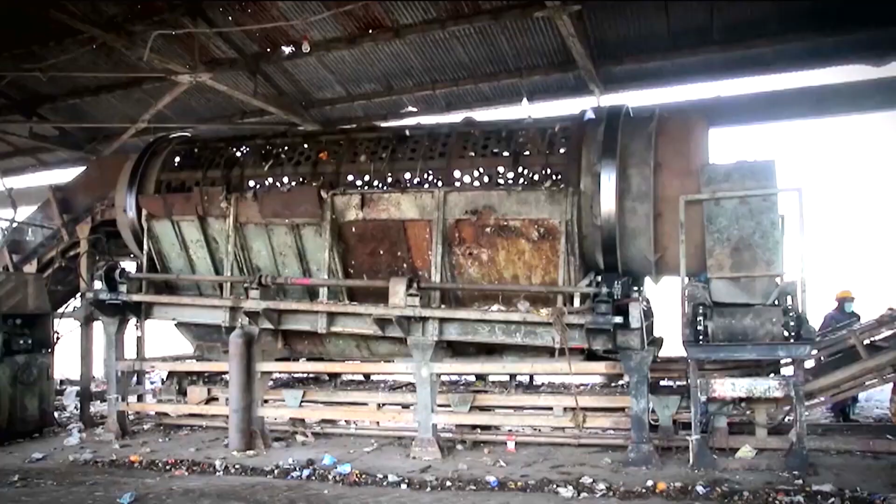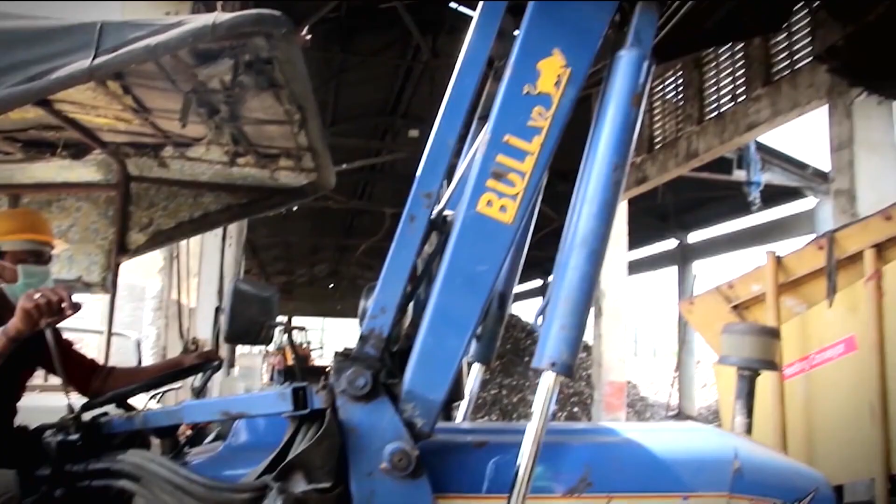Hence, the only solution is to recycle this waste and convert it into valuable substances which can be of use to us. This way, waste could have a new life. And that's where high-end expertise in waste management chains, recycling, waste-to-energy and waste-based fuel comes in handy.

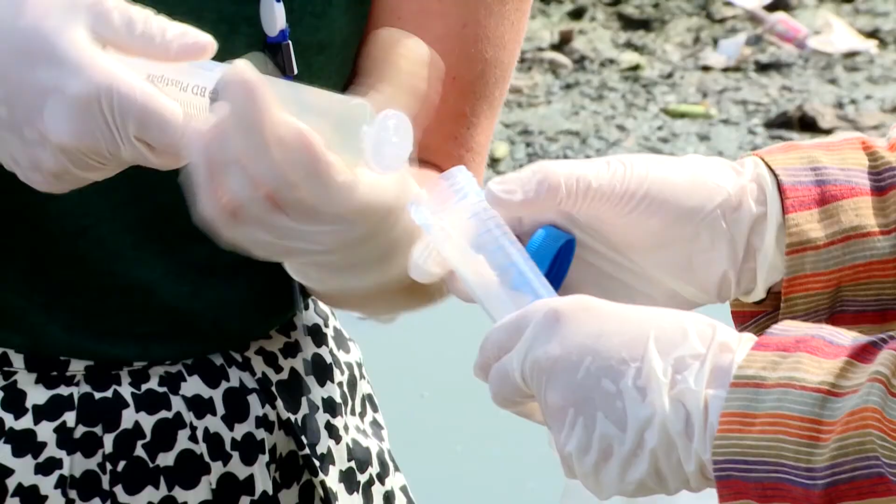The Department of Biotechnology is taking plenty of initiatives to convert waste to value. And in the process, they have supported a lot of projects. The latest of them is the collaboration of DBT with the Dutch to help clean Delhi's Barapulla drain, and finally initiate efforts to keep the Yamuna clean.

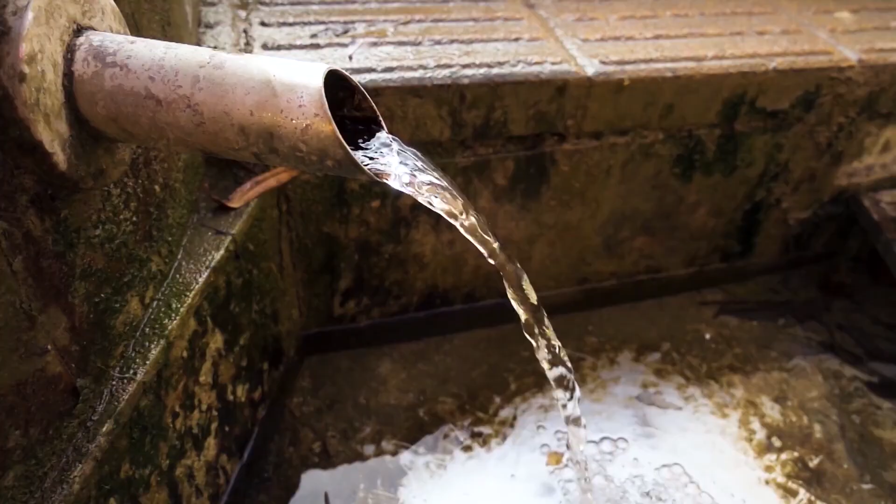The greatest need of all for all humans is water. And with the growing population of the planet, it becomes important to conserve and reuse water which is flowing in drains on a daily basis. Presently, only about 10% of wastewater generated may be treated. The rest is discharged untreated directly into water bodies, overloading rivers, lakes and the ground with toxic chemicals.

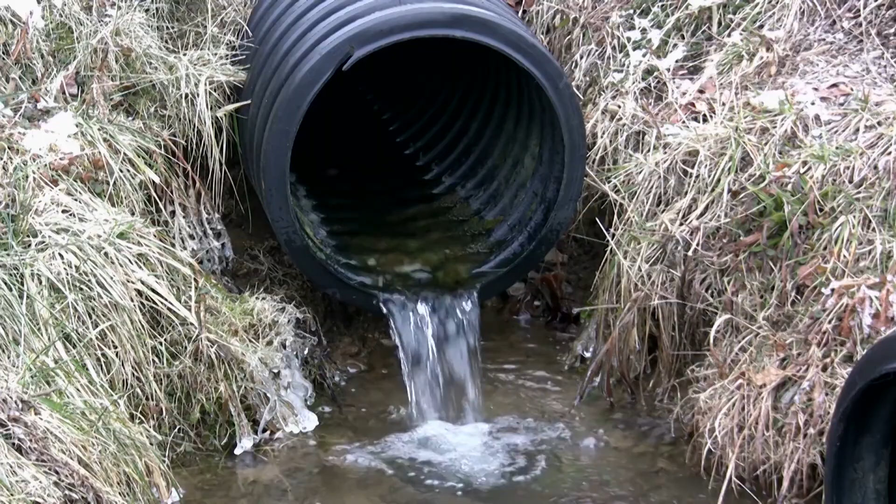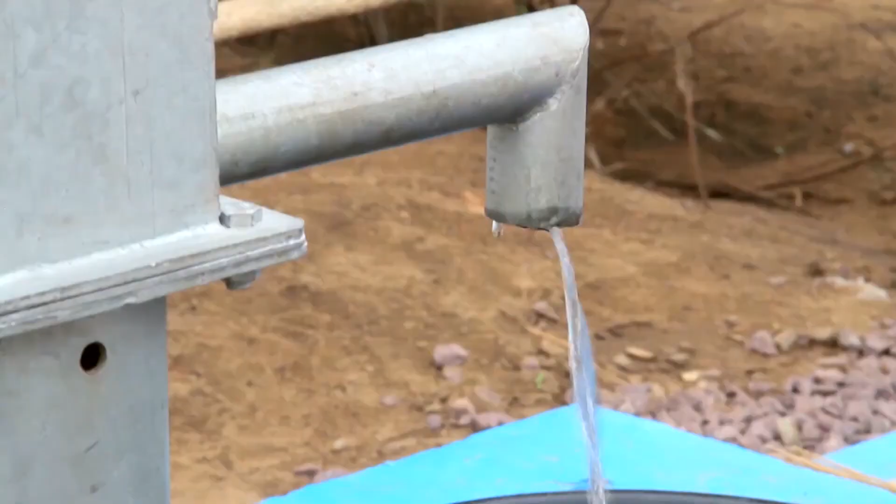As a result, pollutants enter groundwater, rivers and other water bodies. Such water, which ultimately ends up in our households, is often highly contaminated and carries disease-causing microbes. It is also bad for farming and any other water-related activity. These toxins find their way into plants and animals, causing severe ecological toxicity at various levels, including the human food chain.

In India, even if you talk about Delhi city, in the capital city also, the current existing sewage treatment facilities are actually capable to handle only 40 to 50% of sewage we generate. The remaining 50 to 60% of sewage is actually going to the river, and this untreated sewage is creating huge river pollution. And that you can see in Delhi city, the Yamuna river looks like a dead river.

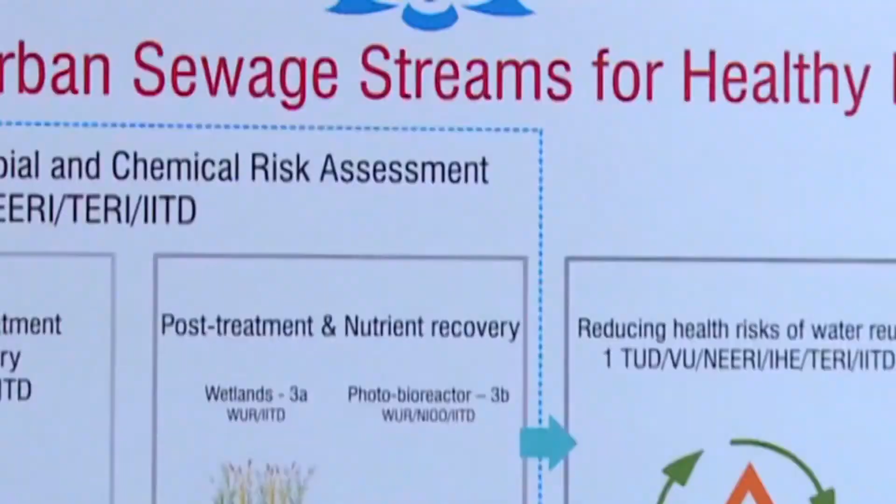Keeping this concern in mind, the Government of India joined hands with the Government of Netherlands and their respective agencies, Department of Biotechnology and NWO STW, and started Project LOTUS, Local Treatment of Urban Sewage for Healthy Reuse. The project is coordinated by IIT Delhi.

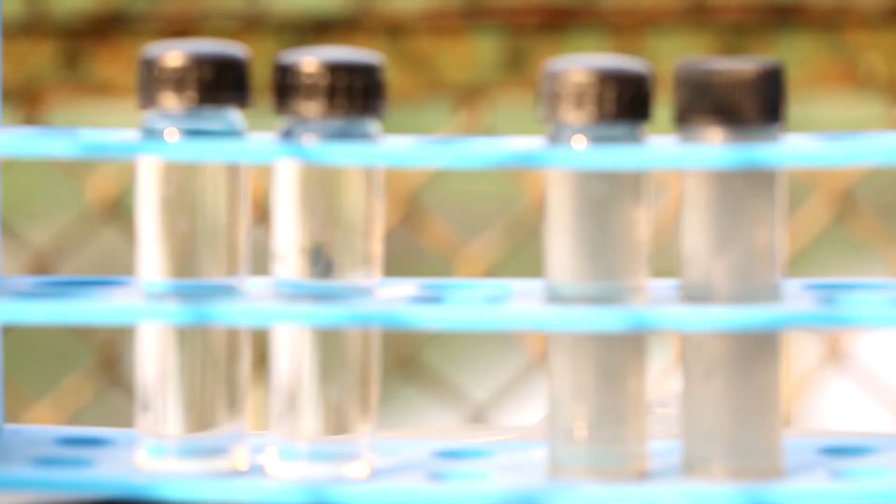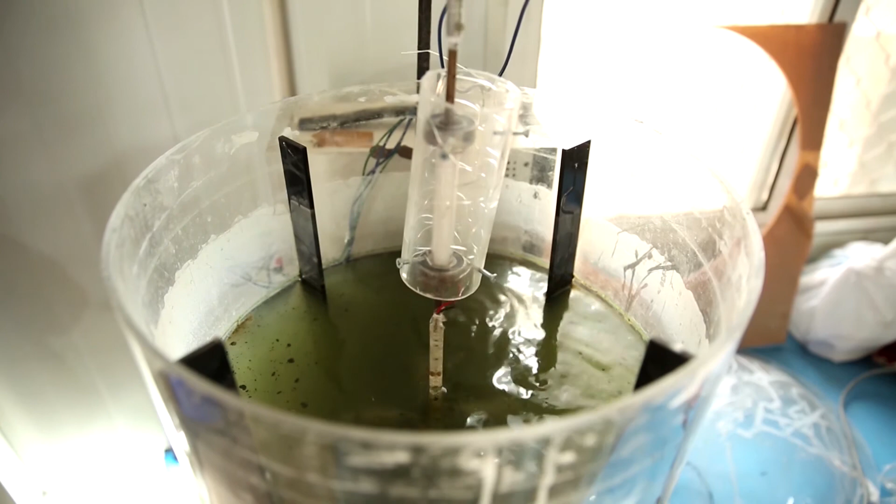The project aims to demonstrate a novel holistic wastewater management approach that will produce clean water that can be reused for various purposes like agriculture, industry, construction, etc., while simultaneously recovering nutrients and energy from urban water, thus converting drains into profitable mines. Special attention is paid to pathogen removal and removing conventional and emerging pollutants.

We are also giving emphasis on treatment of emerging contaminants. Within that, we are targeting antibiotic resistance, we are targeting different pollutants which are present in very small amounts, like nanograms or picograms per liter, and they also show adverse effects on human bodies, because it has already been proven that these emerging contaminants can cause cancer or other serious diseases in human beings.

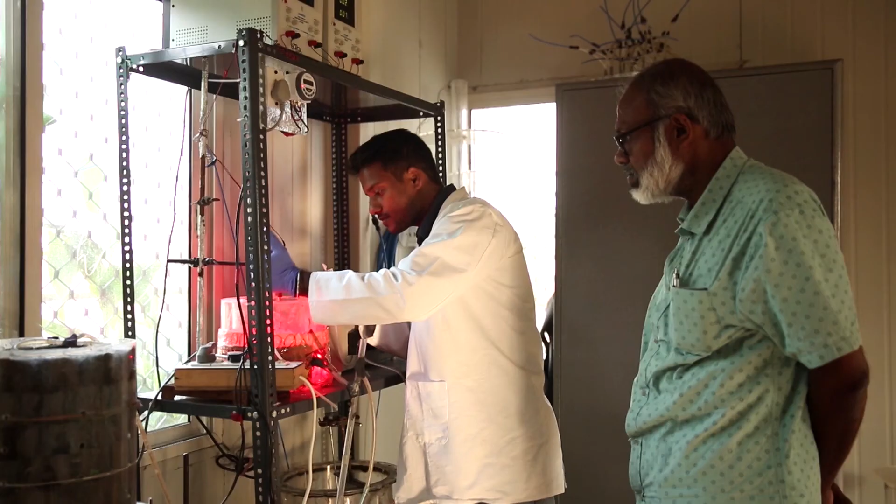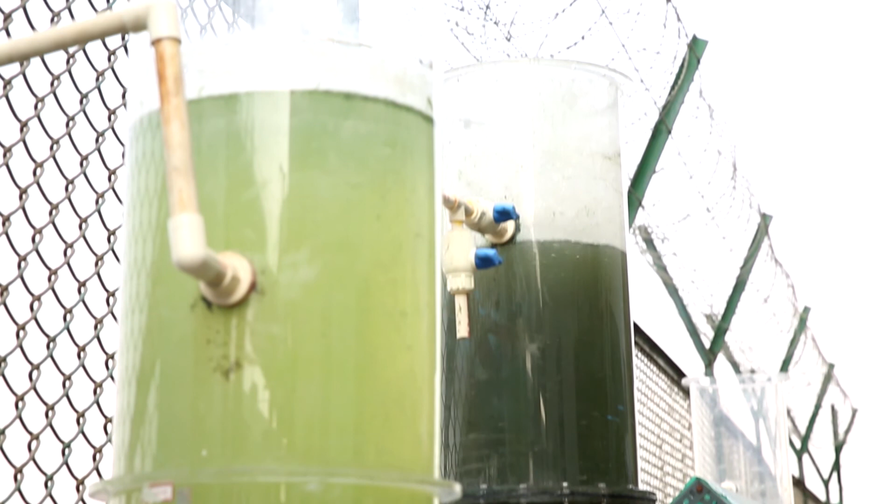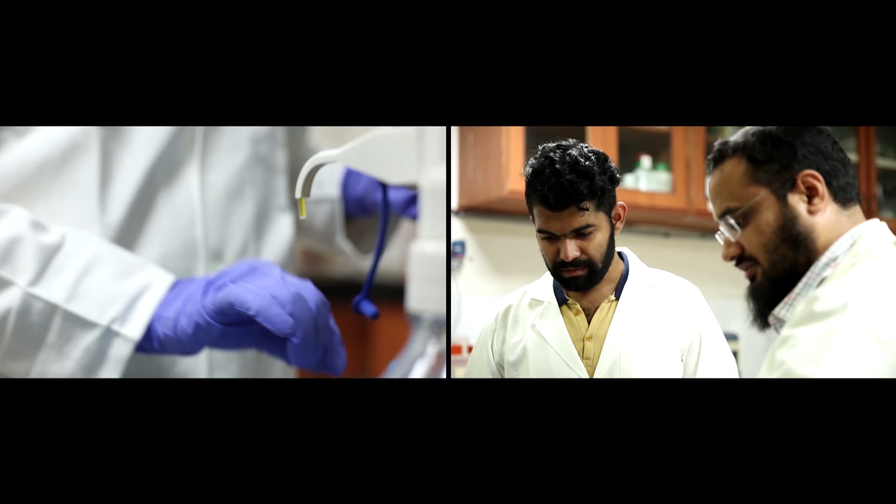An on-site laboratory and pilot plant has been developed at the Barapulla drain in Delhi. The design of this plant is scalable and modular to fit into highly populated urban terrain. It is very difficult to clean and purify water because there are various unseen pollutants, and therefore scientists don't come to know what to treat. To make sure that water is cleaned to the core, different reactors are used for treatment of Barapulla wastewater at this site.

Each reactor has its own unique specialized way of treating water. It is completely centered around treating the drain water. We have this lab constructed at the bank of the drain before it joins the river Yamuna, and all the reactors are set up inside this laboratory, and our PhD students as well as project staff recruited for this particular purpose are all working on these type of reactors with these objectives.

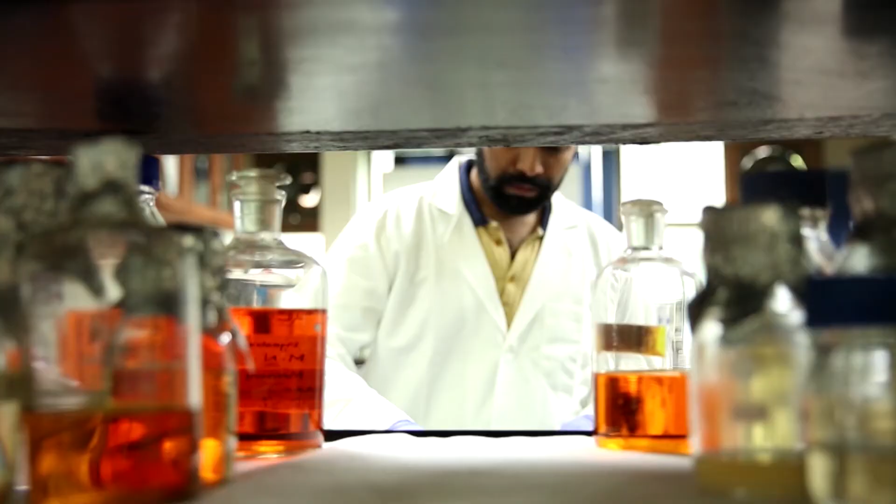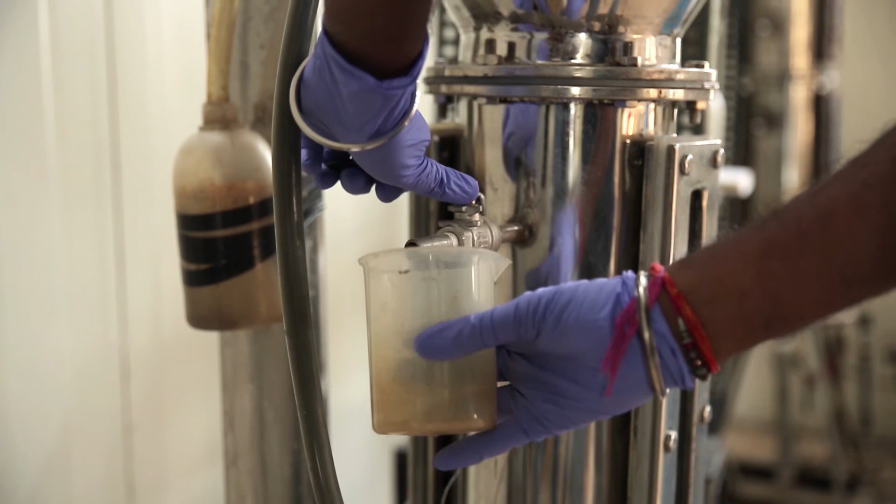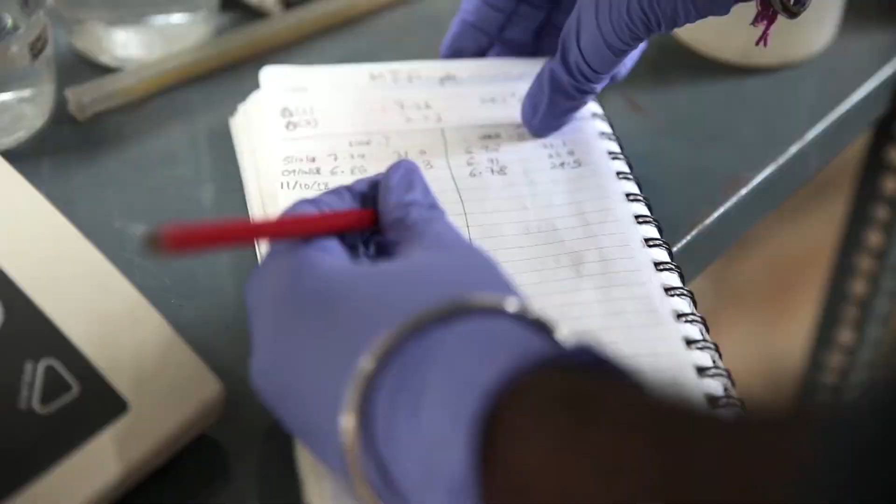It is interesting to know the science behind these reactors because their results are commendable. For example, the modified trickling filter removes both major organic pollutants and nutrients from water. Among these pollutants are nitrogen and phosphorus compounds. This is a more effective and faster process because normally multiple reactors are required for this function.

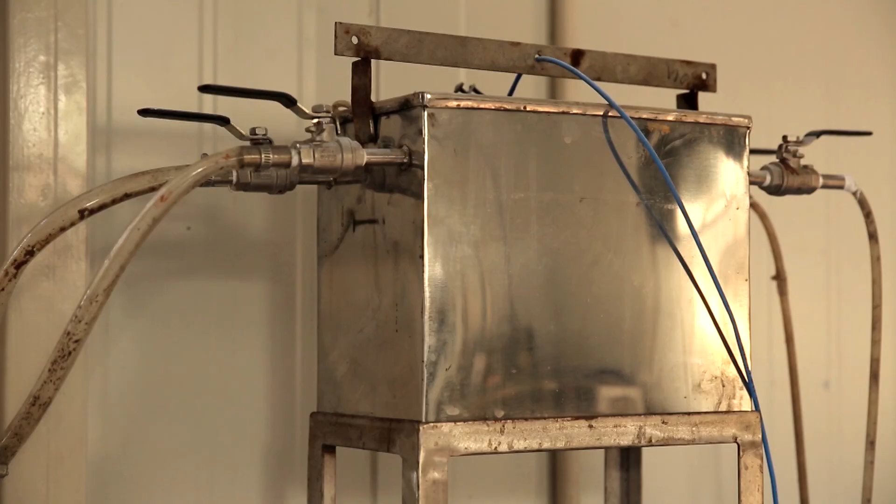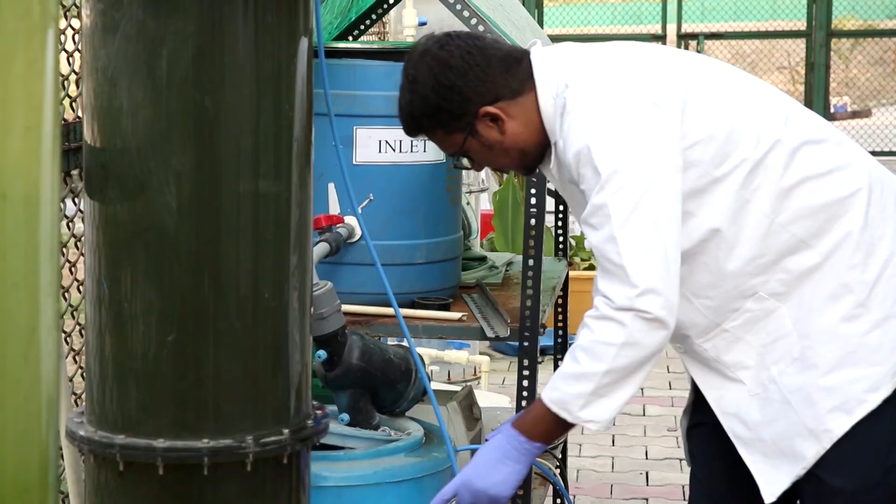This lab is also working on hybrid anaerobic reactor. This process, apart from purifying water, also produces biogas from the waste it generates. Among the other technologies tested here is the algae photobioreactor. Algae is a plant microorganism. It removes organic pollutants from water with the help of sunlight.

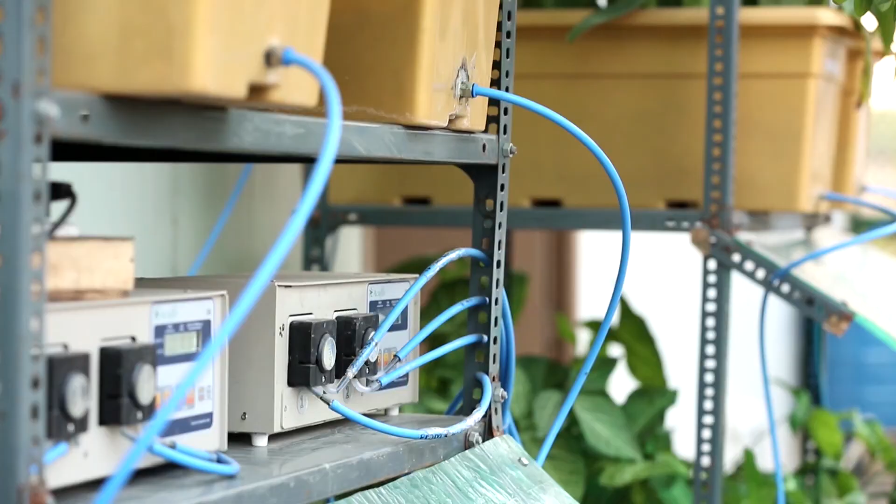There is also a need for supplementary facilities which can reduce the burden on existing wastewater treatment systems. Therefore, apart from all this, Lotus also has constructed a wetland. Wetlands are natural systems of water purification and treatment, which have been used for centuries as a sink for wastewater. In this process, special plants have been selected and planted on a mineral wool bed. These plants have the capacity to treat water and also support the growth of microorganisms.

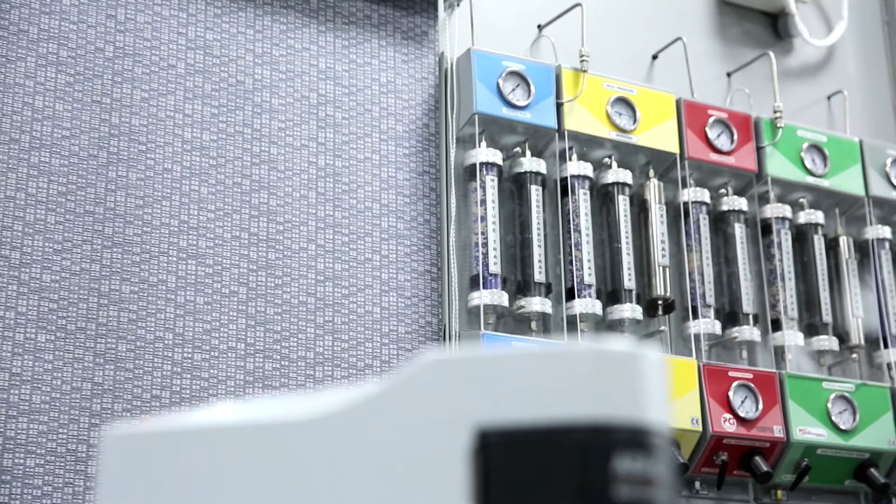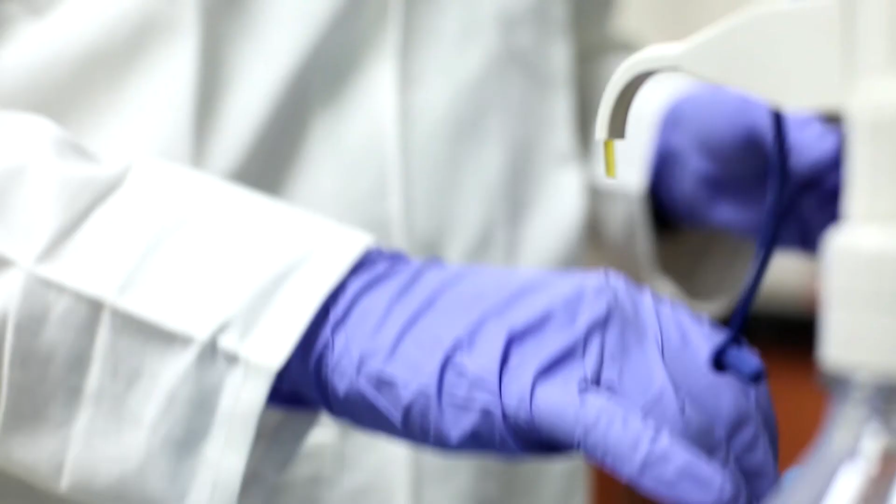All these tests are parallelly conducted in this laboratory, and after a period, an analysis will be done from the results of these reactors. Finally, a particular technique will be chosen to be used at various water outlets of water sources that join Barapulla drain.

Based upon the level of removal of traditional as well as emerging contaminants that we achieve, based upon these results, we will decide upon which will be the best type of a configuration for treating the water which is coming through the Barapulla drain. But this will also generate data which can be used depending upon the composition of different types of wastewaters elsewhere in India also. There are a lot of other methods to purify water, but most of them are very costly and require a lot of space.

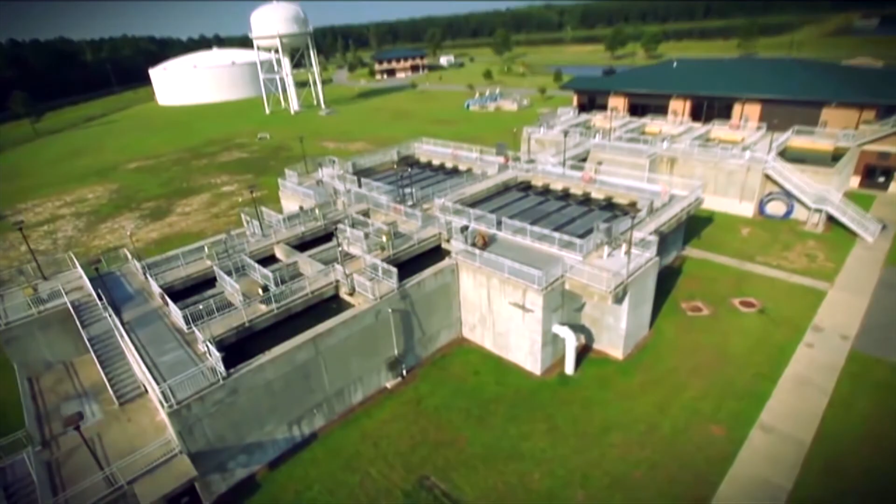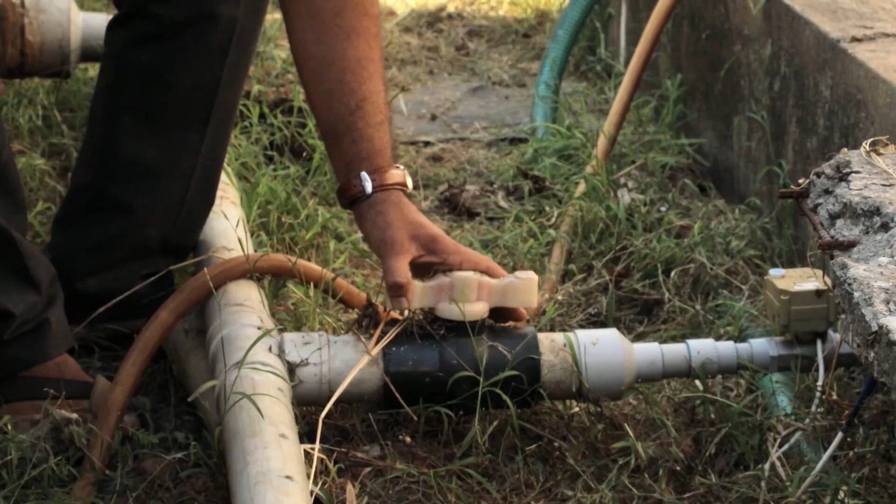In another initiative, Birla Institute of Technology and Science, Pilani, Goa, in association with DST, has developed a wastewater treatment plant which is cost-effective, and wastewater of homes and offices can be cleaned and reused. Their idea is to treat the water at the location itself. If it's a colony of 100 houses, then the plant can be placed there itself.

We have developed for a single household as well as for 100 people equivalent this decentralized treatment system. Like a household having 4 or 5 people, right? So now India is claiming 100% toilet coverage now. So at an individual single household, like 4 to 5 people, they can have their own treatment system. Like the wastewater that comes out of a single household can be treated, and the treated water can be sent out.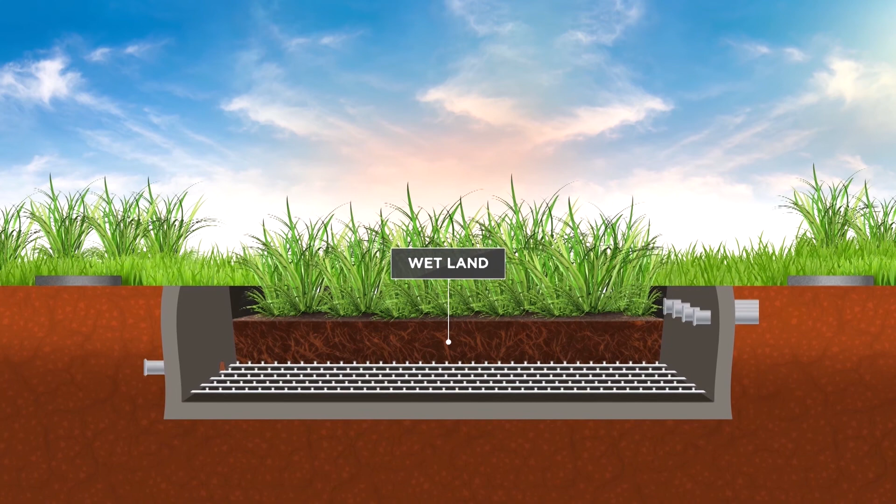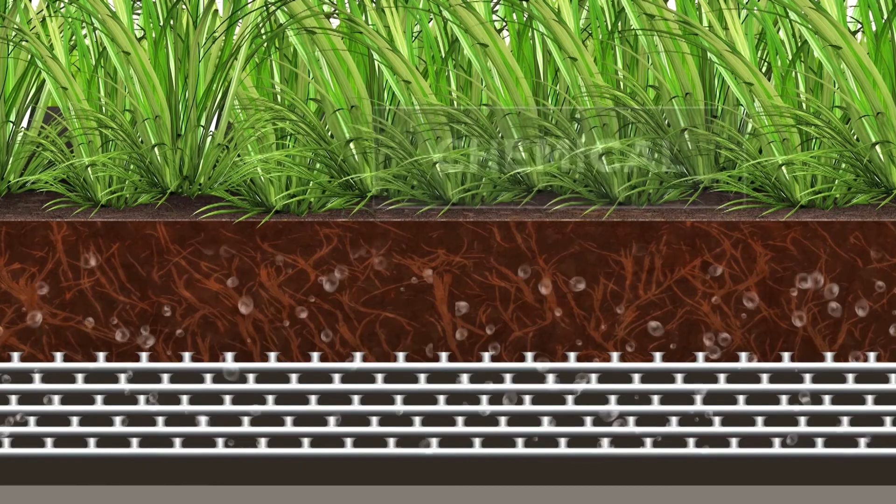The process is very simple. Wastewater from the colony is collected in a septic tank. Through the septic tank, the same water is passed through a wetland. Constructed wetlands are artificial wastewater treatment systems consisting of shallow vegetation ponds planted with aquatic plants with the purpose of treating wastewater by means of natural, physical, chemical, biological and microbial processes.

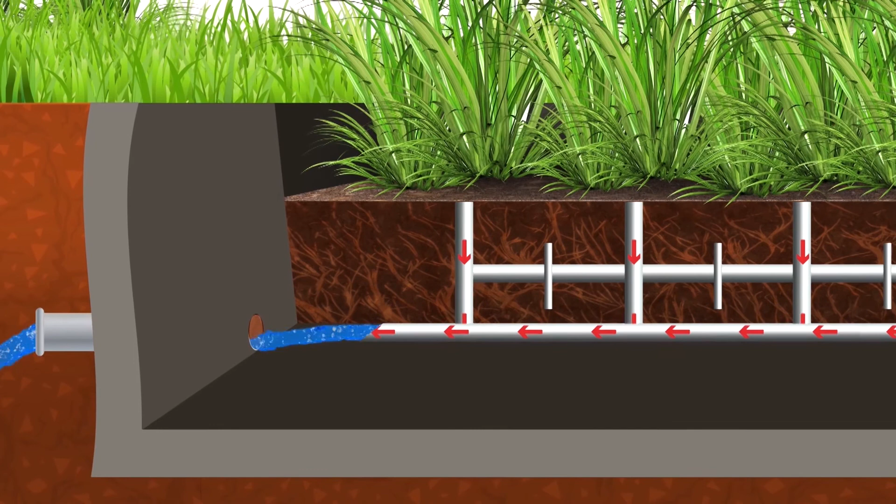They are designed to control the flow direction, liquid retention time and water levels. After passing through the system, the treated effluent is allowed to discharge safely into a receiving surface water or groundwater. They can be used after a septic tank for primary treatment or other type of systems.

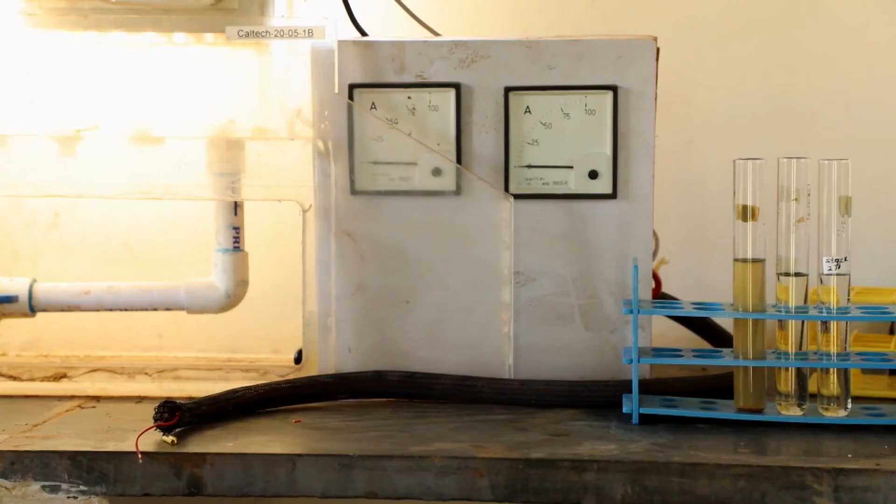The water, after getting filtered of organic matter, is then collected in a reservoir from where it is sent to an electrochemical reactor. The quality of wetland water is itself quite good enough, but the reason for sending it through the electrochemical reactor is to focus on pathogens, helminthes eggs and coliforms.

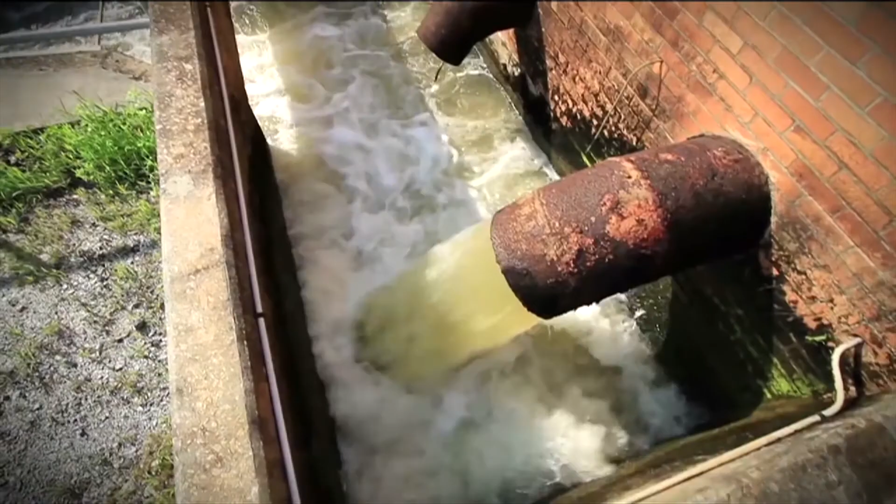In India, most of the treatment systems are with septic tanks, and septic tanks are considered as enrichment chambers for helminthes eggs, which are quite more dangerous than the normal coliforms. This electrochemical reactor, which we had developed in collaboration with Professor Korneel Rabaey and Professor Willy Verstraete from Ghent University, Belgium, actually targets the helminthes eggs as well.

So what we have done, maybe when we go to the field, we'll see that. What we have done is we interchange the acidic and alkaline environments in this electrochemical reactor. So we generate chlorine and then it kills the helminthes eggs. The target was to keep the cost low.

For example, if one uses a public toilet, we pay 5 rupees to use the public toilet, out of which 3 rupees goes into running this plant. So 3 rupees is the running cost per day, including all motors and the power that is used to run these electrochemical reactors.

BITS Pilani is also working on treating municipal solid waste and putting it to use. Municipal solid waste includes commercial and residential waste generated in municipal and notified areas in either solid or semi-solid form, excluding industrial hazardous wastes. India faces a big problem in dealing with municipal solid waste as well as toilet waste. BITS Pilani Goa has tried to find a solution for this.

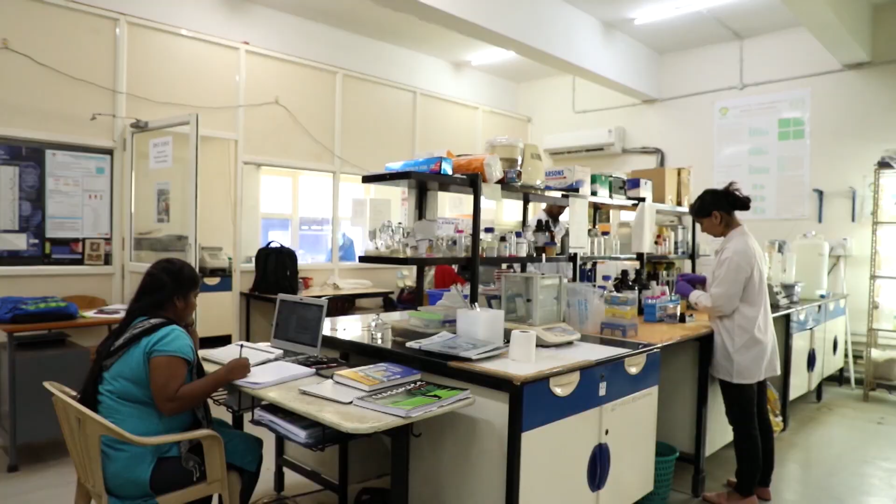All the waste of Vasco Municipal Council or Margao Municipal Council will be collected at the place and separated into solid and organic waste. This will further be treated and converted into biogas, which will further be converted into electricity. In this plant, what we are demonstrating is closing the loop: you produce biogas, convert that into electricity and use that electricity to treat the water, where from the septic tanker we only take the solids out and put them in the biogas plant.

The good part of this project is that two types of waste streams are treated together. So it is like addressing two different problems with a single solution. And not only is it a single solution, but it also gives better results in terms of the amount of biogas that is generated and the stability of the digester. At present, the project is starting at a smaller scale, but the scale can be increased to any extent.

Another category of waste generated in large quantities on a daily basis is organic waste. Though it is biodegradable, it still has to be put to use. Organic waste or green waste is organic material such as food, garden and lawn clippings. It also includes animal and plant-based material and degradable carbon such as paper, cardboard and timber.

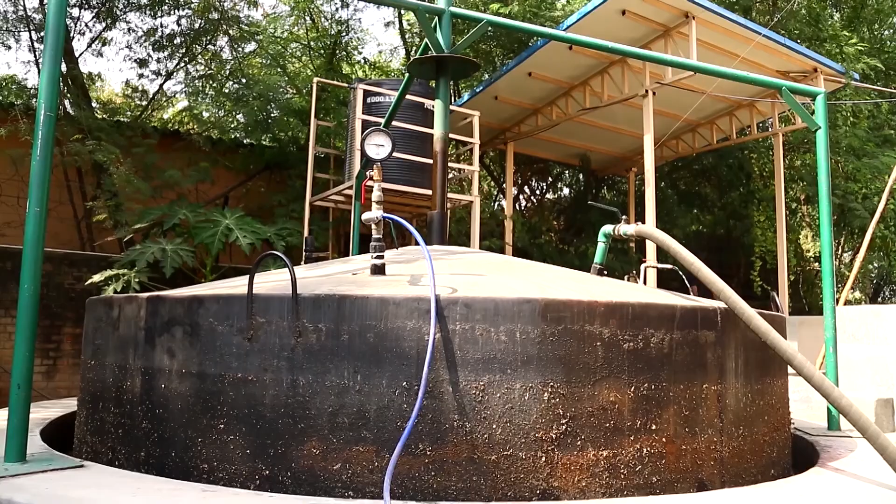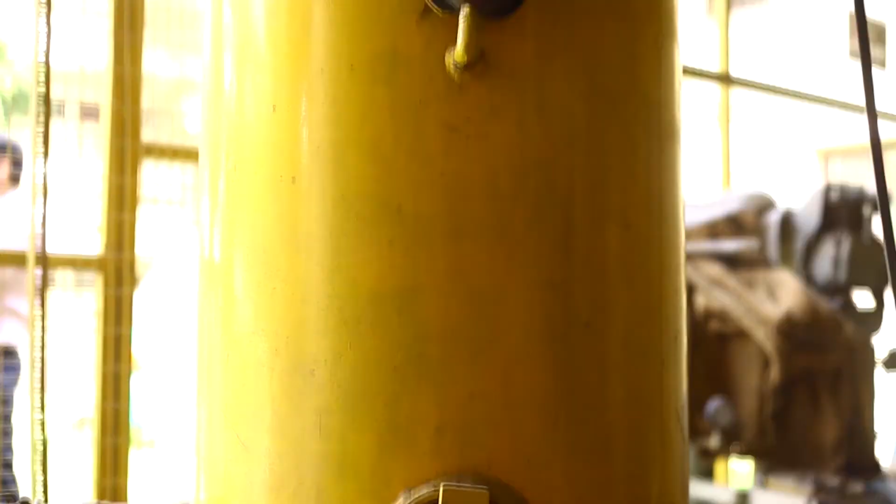Indian Institute of Technology, Delhi, in this regard, has taken an initiative to produce biomethane to use it as a substitute for vehicles or as cooking fuel. They are producing biogas from different wastes such as food waste, jatropha and pongamia oil cakes, which are usually available in rural areas. They purify it by removing carbon dioxide, hydrogen sulfide and moisture and produce biomethane.

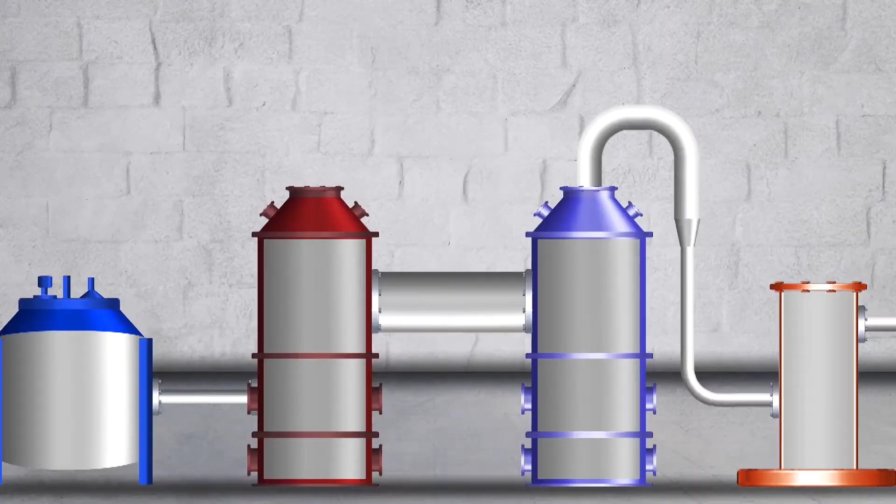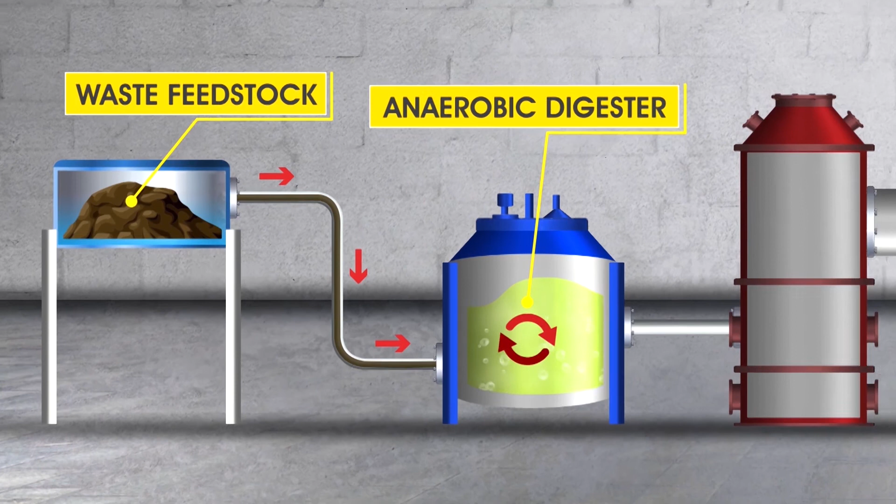Since methane is a combustible gas, it adds the calorific value to biogas. This process is also called anaerobic digestion and is produced in a specialized designed tank or vessel called the anaerobic digester. Biogas is then purified by water scrubbing technology. It is based on the simple process of absorption of gases at higher pressure in water.

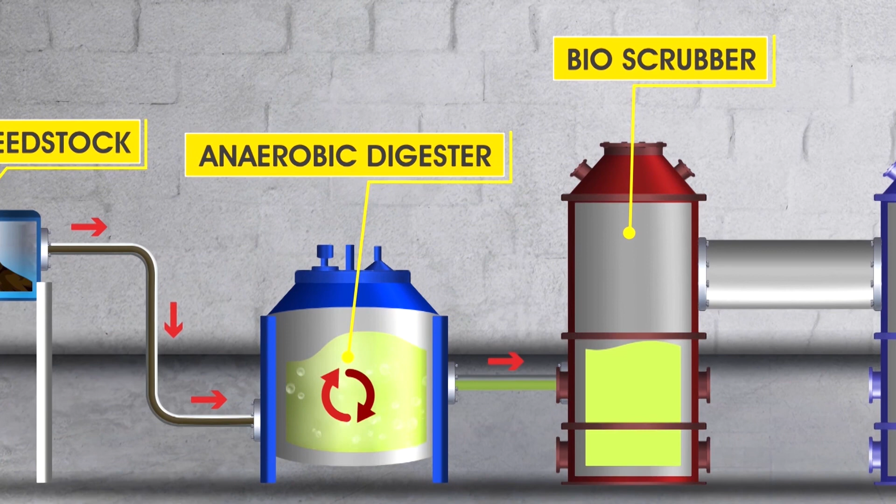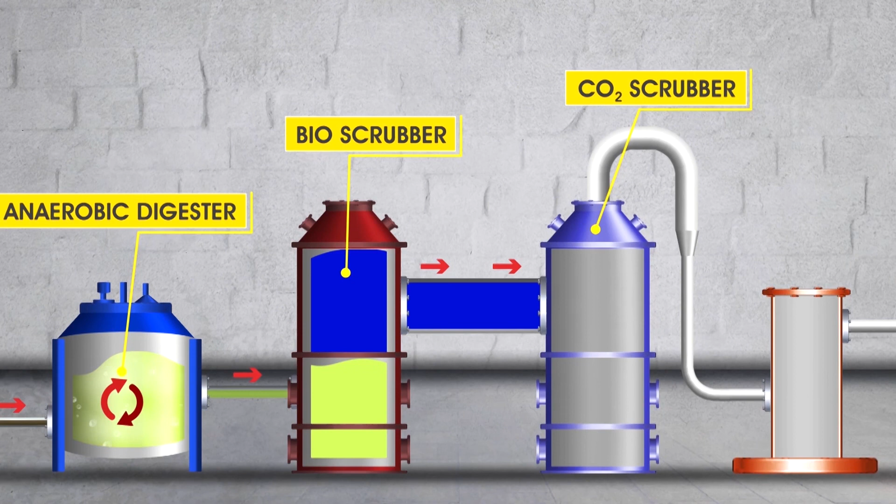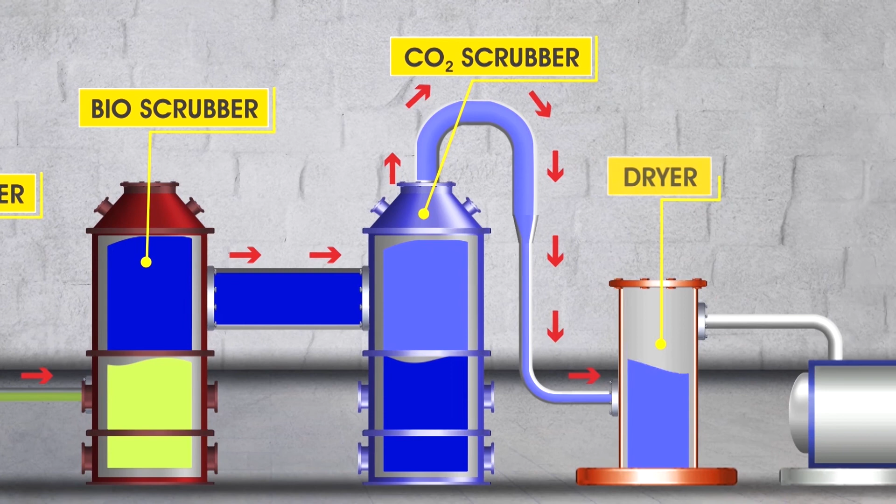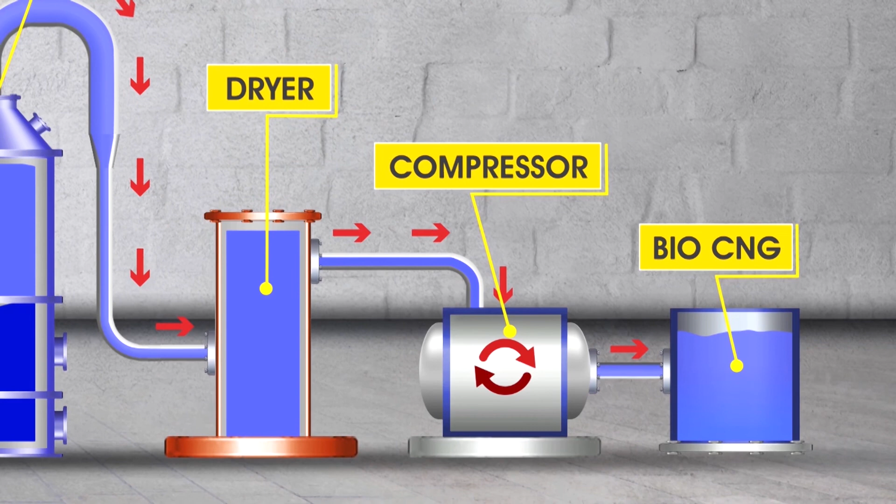They remove carbon dioxide from biogas and make it absorb in water to get biomethane with at least 90% methane content. As soon as raw biogas moves up, carbon dioxide and hydrogen sulfide get dissolved within liquid columns. The enriched biogas is collected at top, and water with impurities leaves from bottom. It has distinct advantages. Most importantly, chemicals are not required during the entire process. The developed system removes carbon dioxide and hydrogen sulfide from the biogas.

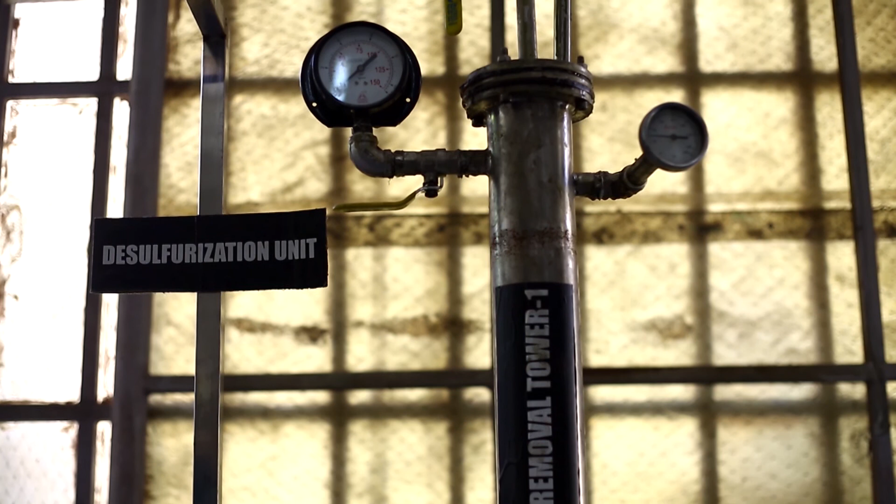Anaerobic digesters produce not only biogas because of the biological nature of gas production, but also digestate, a nutrient-rich, value-added slurry that can be applied directly on agricultural land as a fertilizer, dried to make animal bedding, or processed and marketed as commercial fertilizer and soil amendment.

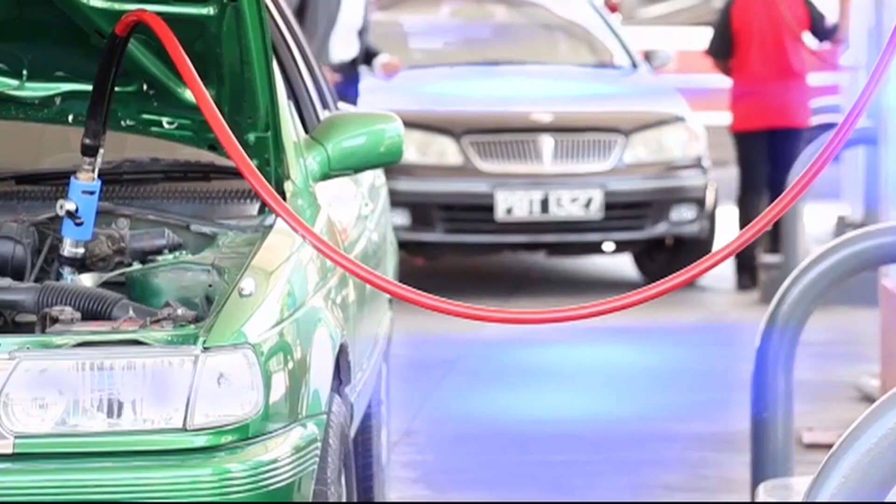We started working on technology on how biogas can be upgraded, compressed and cylinderized in cylinders, and then sold in the market. Biogas in future is able to replace at least 30 to 40% of total fuel requirement in the country. This product can be used in any application where natural gas or compressed natural gas such as CNG is used, like in vehicles, or it can be injected into the natural gas grid and used in cooking as well.

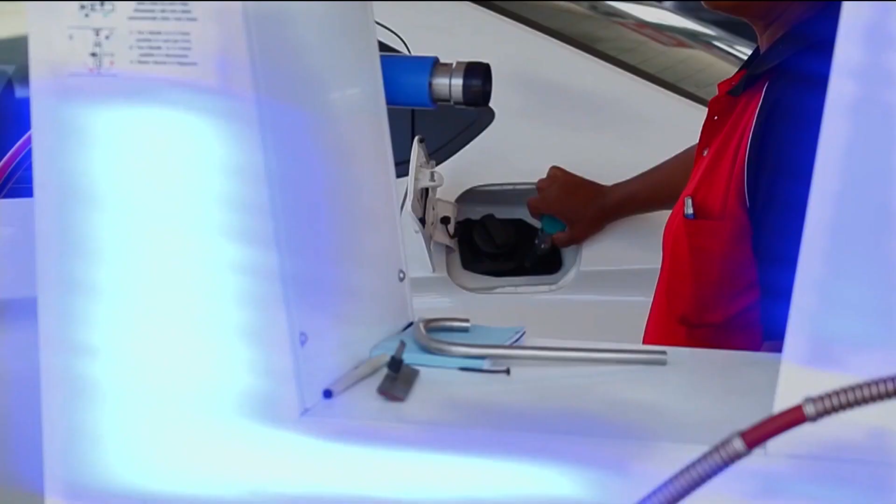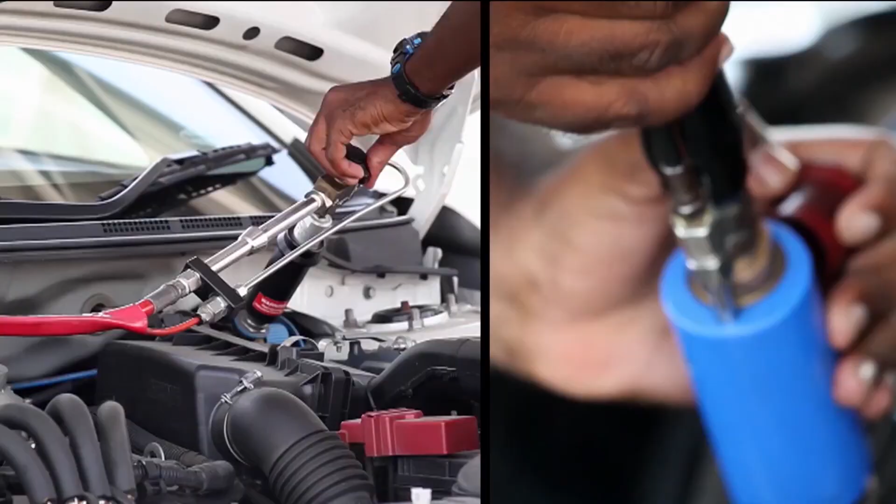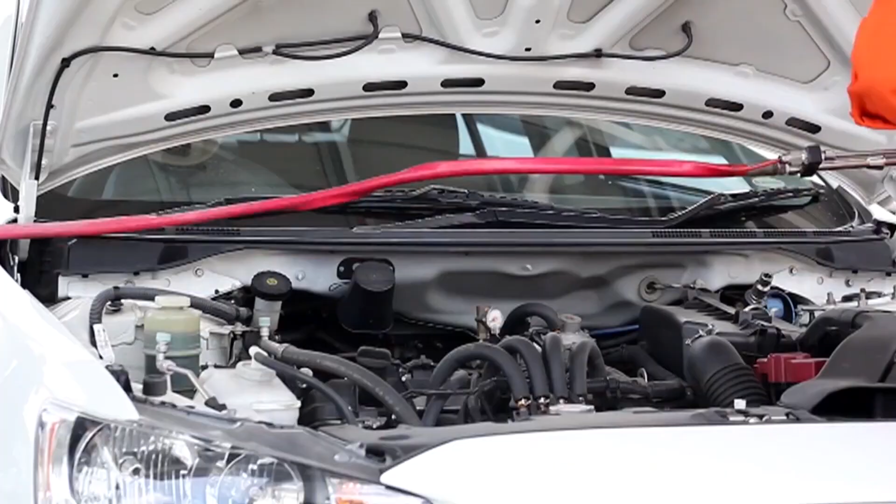Natural gas has methane of fossil origin, whereas biomethane has methane of biological origin. So, it is completely substitutable to natural gas. And on top of it, we get a pure pollution-free product, as CNG produces NOx and SOx, but in biogas there is no NOx and SOx production. It is not different from CNG, it is a substitute to CNG. Since CNG is a fossil-based natural gas, fossil-based methane is there in natural gas, but biomethane has methane of biological origin. In fact, we should be proud to know that the word biogas was given by India.

Through the efforts of the Government of India and the Department of Biotechnology, a lot has been implemented to reduce waste generation in every field. For example, usage of paper has been minimized in a lot of departments. This is the reason that now we don't require a paper ticket in railways and air travel. In fact, Indian Railways launched a mobile application for paperless unreserved tickets. Different colors of dustbins have been placed at various places specific to the kind of waste to be disposed in them. A strict check has been kept on industries and their waste disposal.

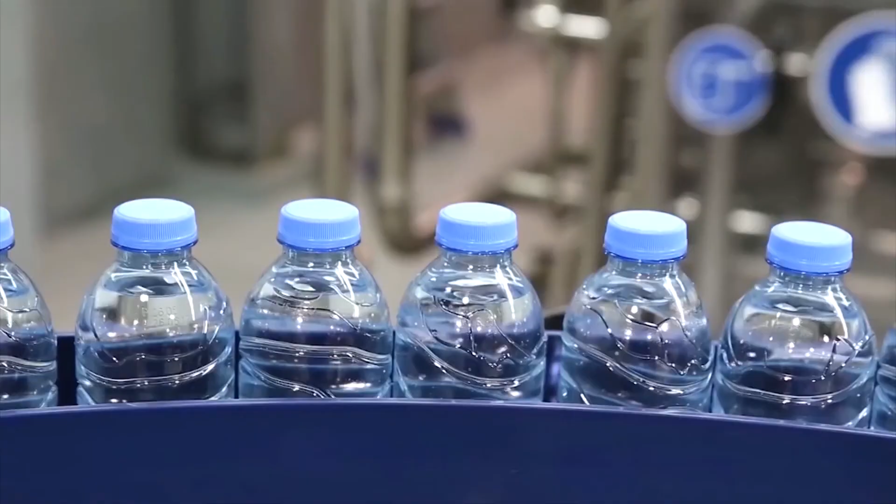The Union Water and Sanitation Ministry has advised all the central ministries to minimize the use of packaged plastic water bottles and utilize other alternatives like steel and glass tumblers and water purifiers and filters in their official meetings to curb the increasing plastic waste menace. Sikkim became the first Indian state to ban disposable plastic bags, and in 2016, it took a significant step by banning the use of packaged drinking water in government offices and government events, and the use of styrofoam and thermocol disposable plates and cutlery across the entire state.

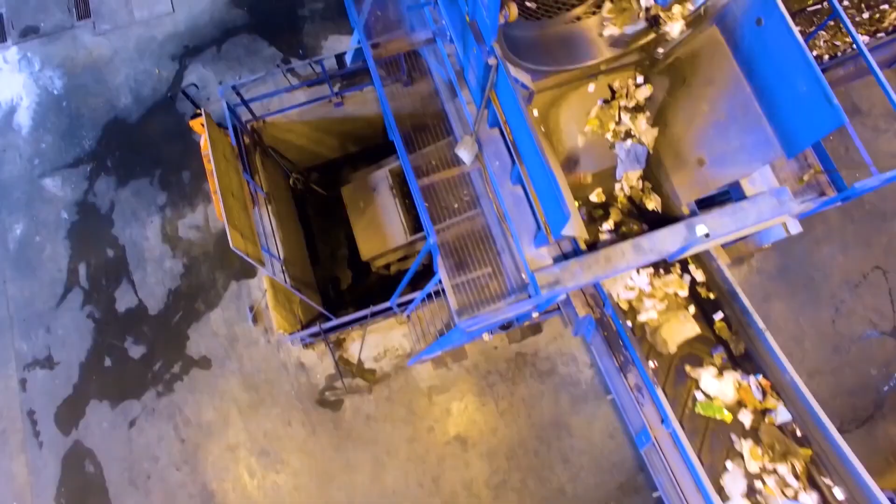Plastic bags have been banned in major cities. As a result, a lot of plastic waste has been reduced. The efforts of the Department of Biotechnology in innovating new ways to put waste to value will keep growing. With time, hopefully every part of our country will be waste-free, and whatever waste is generated will surely be put to use. The dream is to make India a better place for us. The dream is to keep our home clean.